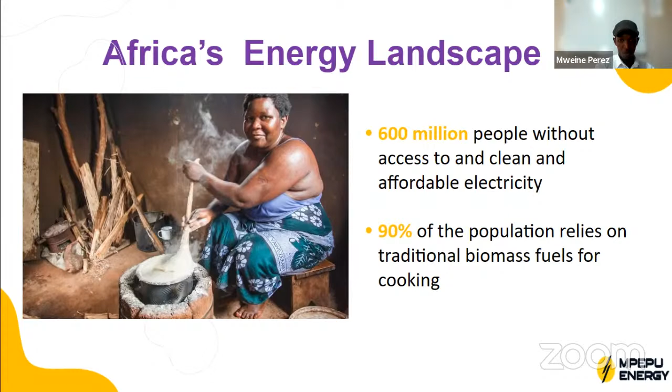This is basically the reason a lot of households are constantly using biomass for cooking in their households. About 0.4% of the electricity that is generated is from bioenergy. So you're looking at 99.6% of electricity that is generated from other sources like solar, nuclear power, wind, hydropower, natural gas, and geothermal.

So bioenergy is the least explored source of energy on the continent, but it has a lot of potential because Africa is endowed with raw materials. It is an economy that is built on the backbone of agriculture. So we have a lot of materials that are available that can be used in the bioenergy sector.

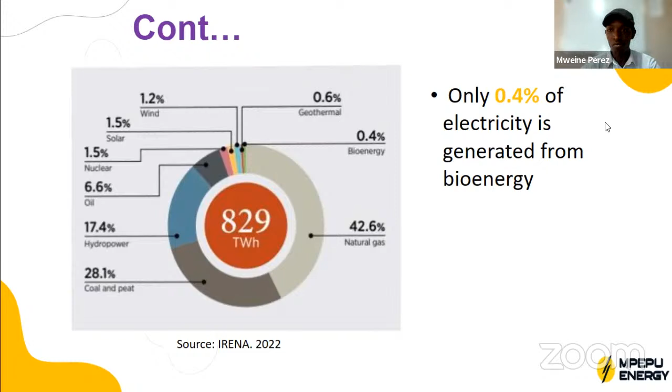It's just that there is that linkage between the raw material available, the technical expertise, and the investment that is required to capitalize on these available raw materials to generate enough energy to close the energy gap, provide affordable and clean electricity that can potentially displace biomass fuels as well as fossil-based fuels that are constantly polluting the environment and exacerbating the effects of climate change globally. Let's move to the next slide.

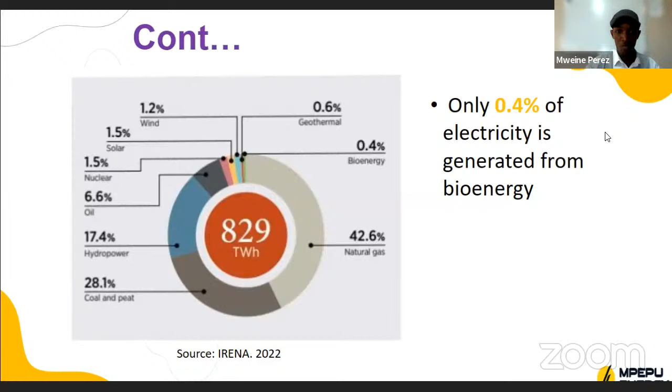When we're talking about bioenergy, we're mostly talking about biofuels. We utilize bioenergy on the African continent for a lot of things, for heating and cooking, but most of it is in the form of just biomass - firewood, crop residues used for cooking and heating, charcoal - these are unprocessed forms of bioenergy. So when we're talking about biofuels, we mean processed forms that can be used efficiently without polluting the environment, producing affordable and clean energy for households as well as institutions.

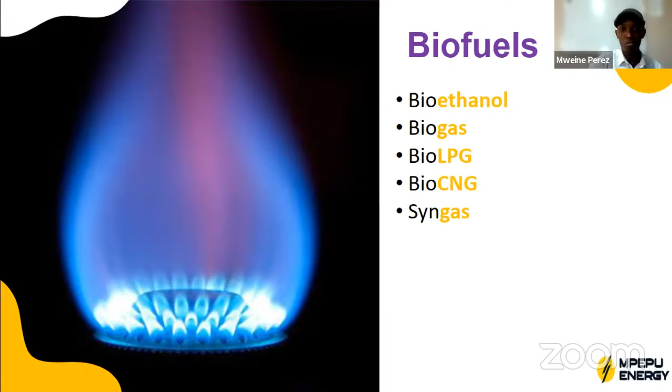I'm going to start with bioethanol because it has been around for a lot of years, actually thousands of years. Basically, bioethanol is ethanol that is derived from biomass - crop residues, maize bran, sugar cane as well. These are the most common substrates used for the production of bioethanol.

It is estimated that Africa can produce about 450 billion liters from the crop residues produced from agricultural activities. Imagine 450 billion liters, but we're not actually exploring this gold mine of bioenergy. Countries like Malawi, Zimbabwe, South Africa are actually at the forefront of ethanol production, but the annual production is in the range between 20, 30, 40 million liters. They don't get to billions of liters.

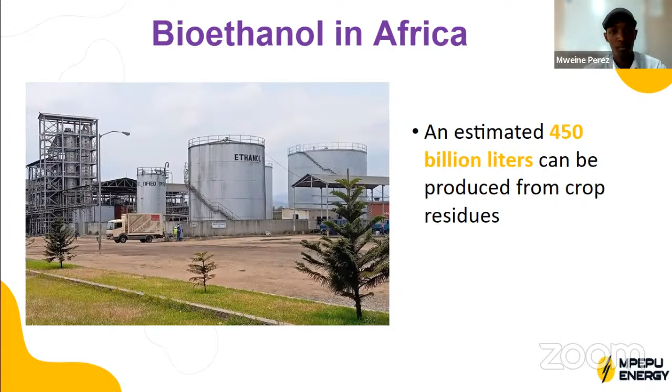In Africa, bioethanol has been used in transportation, especially in blending of petrol and ethanol. In Malawi, this started in the early 2010s. The government passed a policy that mandated companies importing petrol to blend ethanol with petrol. I think it's blended at something like 90% petrol to 10% ethanol.

Other countries like Kenya, South Africa, and Zimbabwe do the same - they blend their petrol with ethanol. But this is not the furthest you can do with ethanol, because you can actually drive engines with ethanol using fuel flex engines. You can fuel vehicles with just pure bioethanol to drive vehicles. This is actually really common in Brazil.

In Europe, they've developed cars that have fuel flex engines, cars that can take both petrol and ethanol for driving. This technology has not reached Malawi yet. If it has reached Africa, it's in the very piloting phase. Of course, we had one vehicle in Malawi that had a fuel flex engine, introduced by the National Commission of Science and Technology, but ever since then, we haven't seen any advancements in that technology.

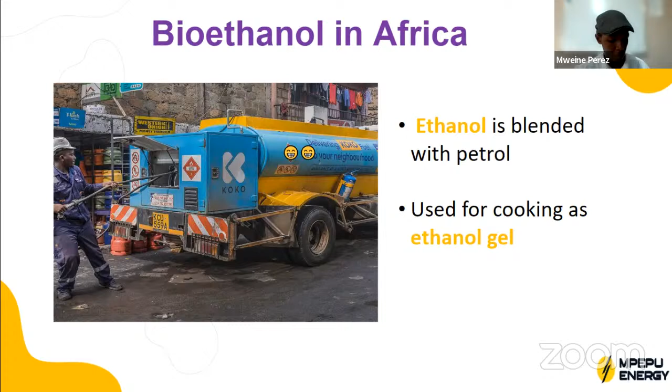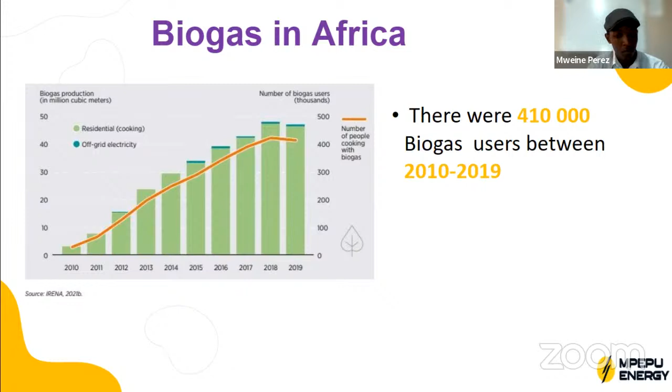So there's been a lot of advancement in the biogas sector. In Malawi, we have one entrepreneur who set up his own company, and he imports these bag digesters from China and has installed over 60 biogas digesters across the country. So bioenergy really does meet the demand for energy for cooking. Biogas does meet the demand for energy for cooking. I've worked with bag digesters before, and they can actually provide enough energy to power institutions. It can provide energy for cooking as well as electricity generation. You can actually use the biogas for lighting as well.

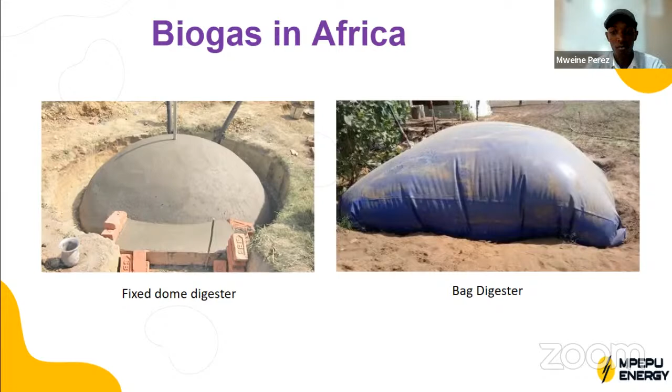It's a technology that was developed. I think they tailor made it for Africa. You can have a whole system that has lighting, electricity generation, as well as cooking equipment. So this is just the base of what you can do with biogas, because on my next slide I'm going to show you what other companies in Europe are actually doing with biogas. Let's move to the next slide.

I think it's less than 1 megawatt, but it produces electricity from palm oil effluent, waste oil from palm oil processing plants. So this is just the evidence that there is enough raw materials in Africa that can be used to generate bioenergy for electricity generation. In European countries, they can generate up to 50 megawatts of electricity using things like cow dung, using vegetable waste, and other industrial waste.

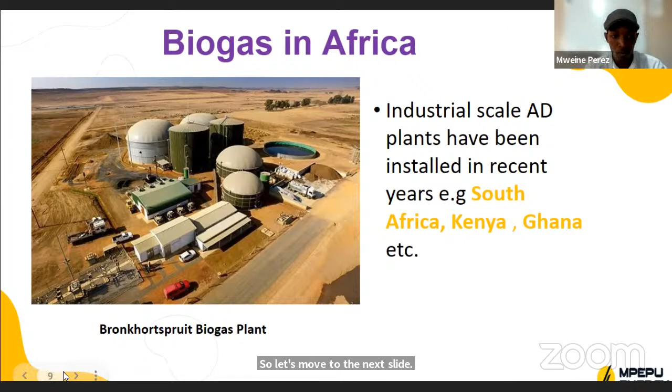So in this section, I want to talk about the prospects of bioenergy in Africa, the prospects of bioenergy, the advancements that are there that the African continent can adopt. These are technologies that are gaining traction in other countries, in India, China, in Europe, and with our vast resource

of raw material, we can capitalize on these technologies to produce biofuels that can meet the demand for electricity for powering households, biofuels for cooking, as well as biofuels for mobility, driving cars, and other uses. So I want to talk about bio-CNG. Can we move to the next slide?

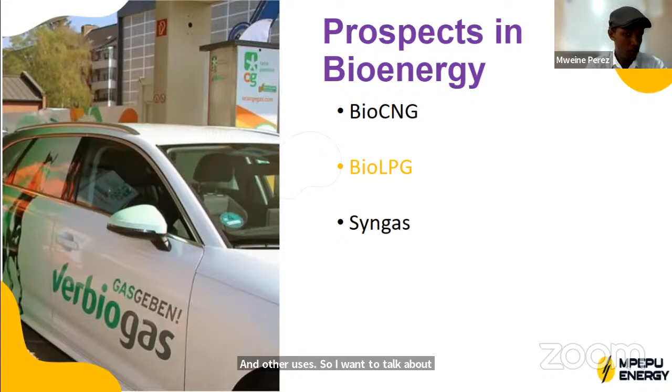So bio-CNG is an upgraded form of biogas where all the other impurities are sucked out, and which is at about 98%. So bio-CNG has a lot of uses. It can be used for cooking, it can be used for heating, it can be used for driving cars, as in powering engines. It can be used for electricity generation in combined heat and power generators. So

in the plants that I've mentioned, the one in South Africa or Kenya or the one in Ghana, they do produce bio-CNG, but the bio-CNG is directed towards electricity generation. We're yet to have a power plant that produces solely bio-CNG for bottling and distributing in households, as well as institutions for heating and cooking.

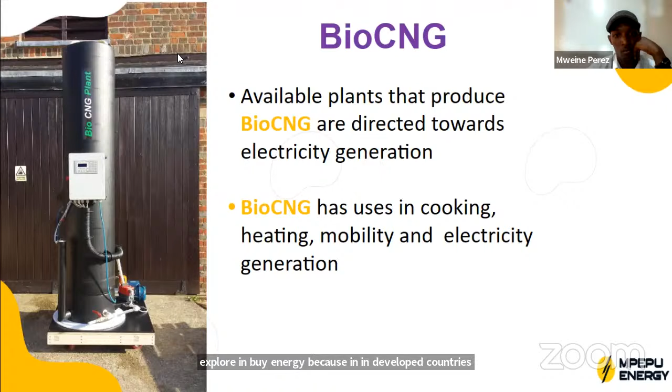where they have gas that is directed to households from a production plant, and then they use pipelines and direct it to households. So we haven't reached this level yet of exploring biofuels, but I hope in the near future I could get back to this project and maybe someone can pick it up and they can explore it. Let's move forward.

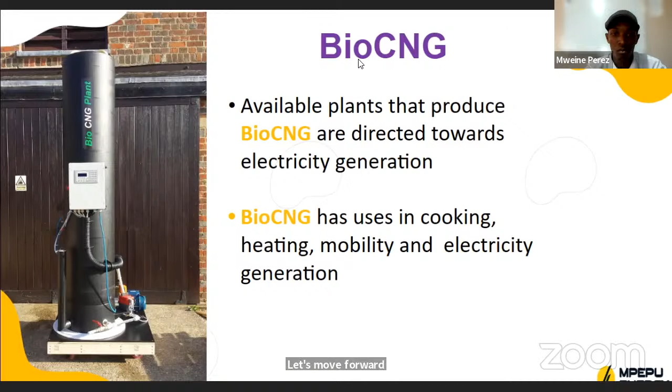But the difference with this bio-LPG is that it is not sourced from petroleum, but biomass. So you can actually use biogas, biodiesel waste, or synthetic gas to produce bio-LPG. So with biogas, you basically just disintegrate the methane gas into carbon and hydrogen atoms, and then reconfigure them to produce butane and propane. Of course, using several processes that I don't want to get into details. So it's a very sustainable and clean way of getting liquefied petroleum gas without having to drill the earth and burning all those fossil fuels to get fuels for cooking.

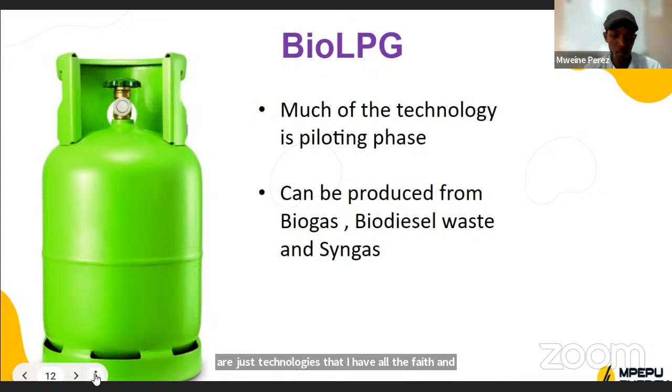So the technology is actually in the piloting phase. Even in European countries, they are piloting this technology. We actually wanted to pilot it in Malawi together with the people that I worked with, but we never got further with that as well. But these are just technologies that I have all the faith and belief that if introduced to the African continent, we have the materials, we have the technical expertise. We just need the right investment and the right technology that we can put into this. So yeah, let's move to the other slide.

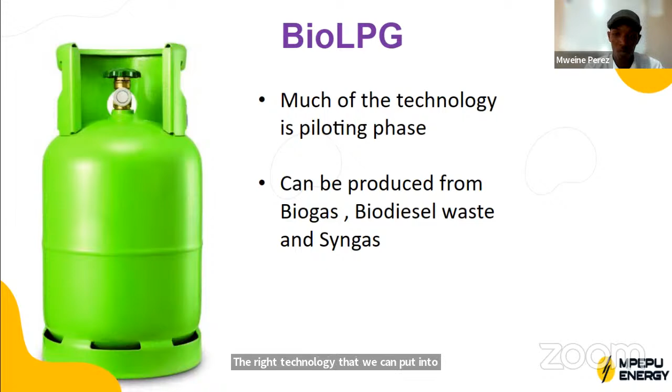So the other fuel that I wanted to talk about is synthetic gas. So synthetic gas is a gas that is produced from a process that's called gasification, or pyrolysis. This is where you burn a carbon-based biomass material in a controlled environment to produce hydrogen and carbon monoxide. So if you're using steam reforming, they use steam reforming to produce CH4, which is methane, and methane can be used for generating electricity, for cooking. It's basically natural gas or compressed. They can use it as a CNG for cooking, for electricity generation, as well as mobility.

So in Africa, the technology is in the piloting phase. We had pilots at the Malawi University of Science and Technology where they were using rice husks to generate syngas and use it for generating electricity. They were generating about 30 kilowatts of electricity. But syngas has a really huge potential in bioenergy because we have a lot of crop residues that are not used. We have a lot in the south, in the central and the northern part of Malawi.

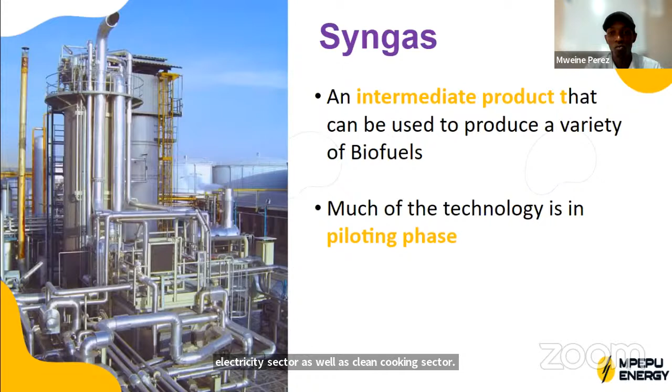You see, when you're talking about renewable energy, it's mostly solar energy. We talk about solar home systems, we talk about solar mini grids, but there isn't much conversation going into the bioenergy sector. There aren't a lot of people that are aware of what biomass waste can do. You can generate electricity with it. You can generate all sorts of fuels that can be used in the energy sector.

The other challenge is the conflict on raw materials. So in developed countries, they use raw materials that could otherwise be used for food in the African continent.

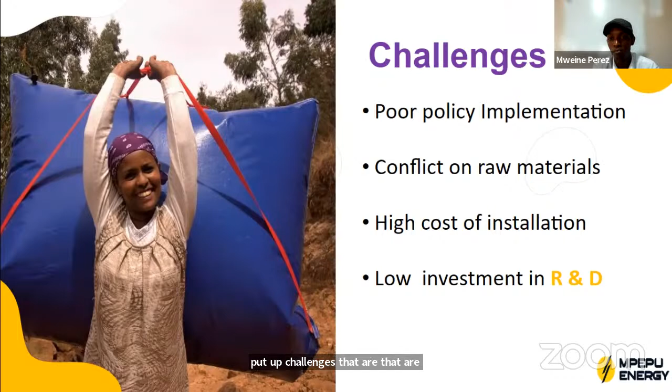So these are just a few challenges that I put up, challenges that are constricting the investment of bioenergy in Africa. So we have challenges, but now I want to talk about the opportunities that we have. The first opportunity is the policies are there. We have the policies. The regulatory frameworks are there that were set in place to regulate bioenergy, to allow the investment into bioenergy.

But like I said, there isn't a lot of interest. There isn't a lot of investment that's going into pushing these policies to implementation. These policies are not being implemented effectively, so it might seem like nobody's interested in them. But the government already set out a platform where these technologies can be effectively immersed into the continent.

Another thing is raw materials. Like I said, the raw materials are available. Africa is a continent that has an economy backbone based on agriculture. So we have a lot of waste materials from the agriculture sector that are just thrown away. Sometimes they are burnt without being used. So the other problem is people don't actually understand that agricultural residues are a gold mine that can be used to produce things like briquettes, biogas, ethanol.

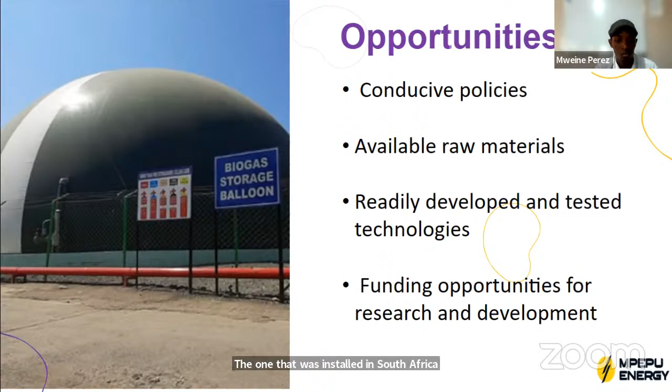There's also EEP Africa. I think the biogas plant that I showed you, the one that was installed in South Africa, was actually funded by EEP. It's a European organization that funds bioenergy projects as well as other energy projects. We also have the Global Innovation Fund by the USA, and we have a lot of funding opportunities that are going into research and development in the energy sector, and bioenergy is at the very forefront of this.

On my closing remarks, I'm very enthusiastic about bioenergy. Bioenergy holds one of the biggest potentials in providing energy across Africa, in electricity, mobility, as well as cooking and heating. But like I said, there isn't that catalyst that's bridging investment, the availability of raw material and the technical expertise that is available to effectively explore this sector for a sustainable future for all of us.

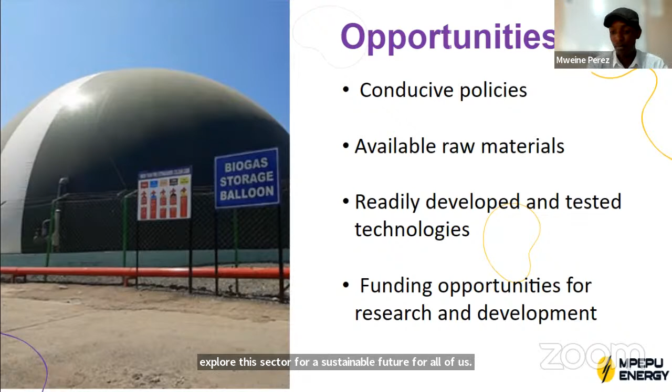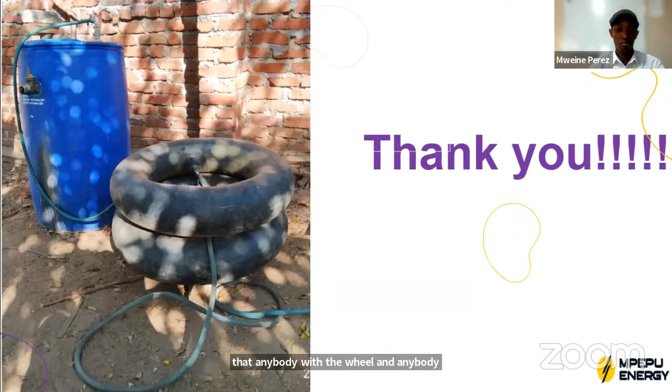Let's move to the next slide. I just want to show you my small biogas plant that I built in my backyard. So the drum is the small plant, and the tubes are where I kept my biogas. So like I said, biogas is very basic. Anybody can do it. There just isn't a lot of interest in these technologies, but they're very simple technologies that anybody with the will, anybody that's willing to learn and has the right investment, can put effort into and grow a business from.